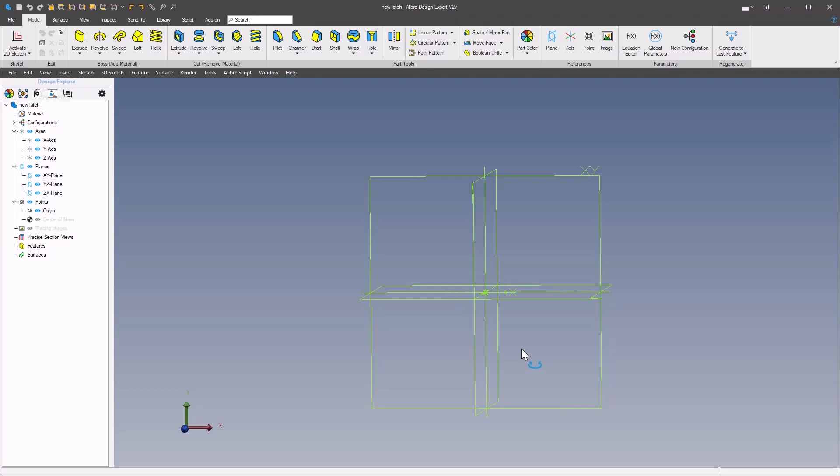Okay, in this video we're going to do another sheet metal tutorial in Alibre sheet metal, except this time instead of parts that have straight 90-degree bends or 45 whatever, we're going to do something a little bit different. We're going to do some stamped features. Now Alibre can bend this 90-degree bend without any problems, but it's going to have a major issue forming this part here. So what I'm going to go through today is showing you how I created this part, actually by inserting a drawing or an image and then modeling off of that image. So let's go ahead and get started.

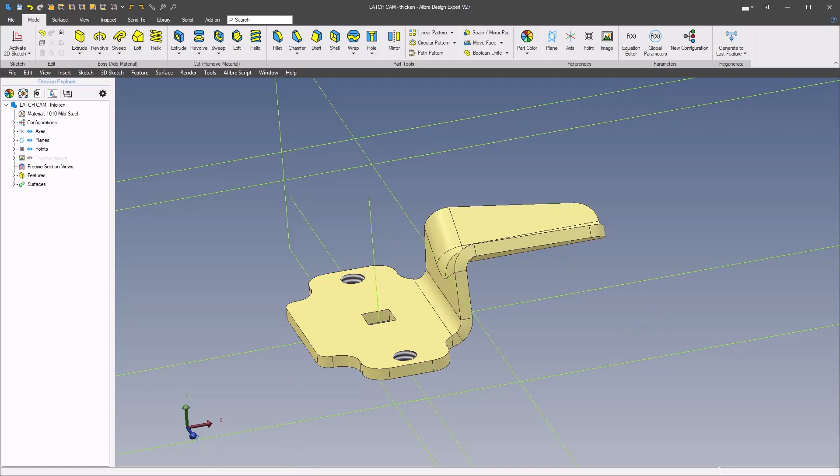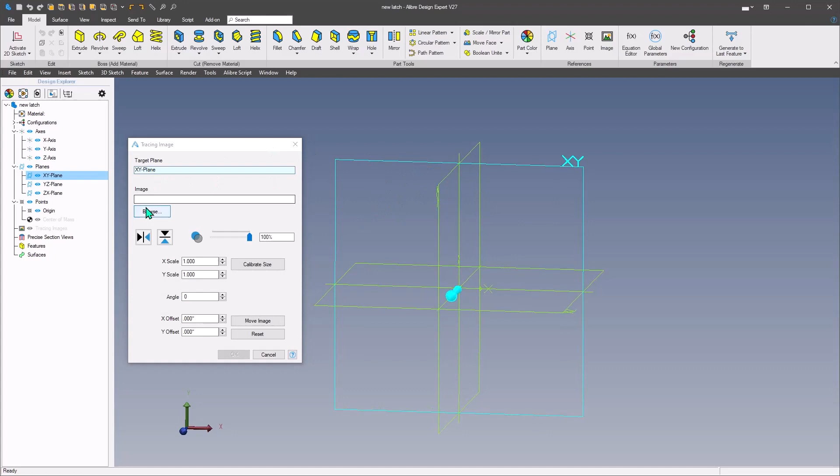So now in this new part workspace, the first thing I'm going to do is go up to my insert menu and grab the insert tracing image item, and then the first thing you want to do is select your target plane. So I'm going to grab the XY plane, and then the next one is click on browse to go grab the image that I need.

So I'll go to my Snagit folder and I'm going to grab my latch cam drawing. Now when you bring in an image, the first thing you want to do is make sure that your view is set normal to your screen, and then you want to scale your image so that you get the right size.

So we're going to calibrate for size, and I'm just going to come up here and click on calibrate, and then click on my dimension line up here, and then come straight down and click on this lower dimension line, and then I'll have a dialog that I can key in the 2.75 and press enter. And now this part is scaled to the right size.

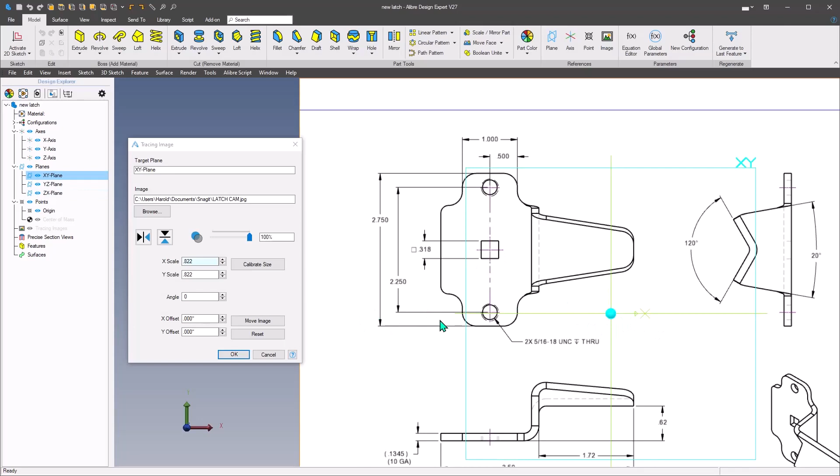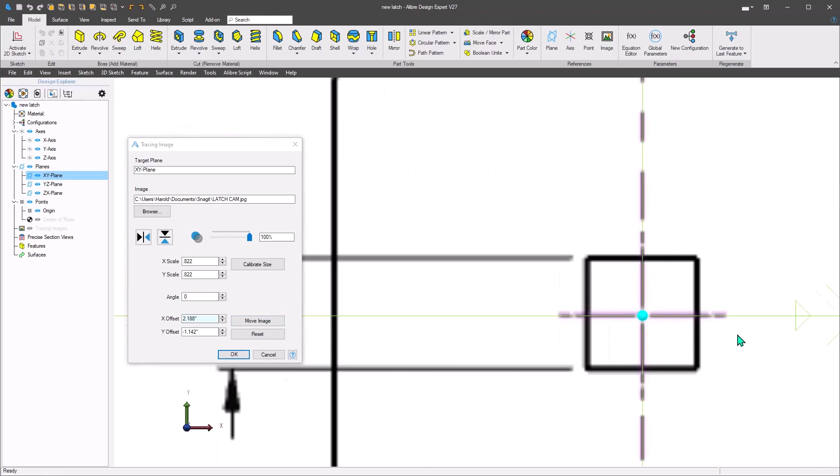Now this is my origin, and I want to get the center of this square hole over the origin. So the way to do that is click on move image, and now I can use a wheel mouse to scroll to zoom in. I'm going to put my cursor right on the center of that crosshair and click one time, and then I'll just pan over and then click on the origin, and the drawing will move to that location. You can tell that it's fairly well centered on the origin and the axis lines. And then click OK.

And come back here in the Design Explorer, and we'll just turn that back on by hitting the visibility icon. And now we're all set to start creating our part.

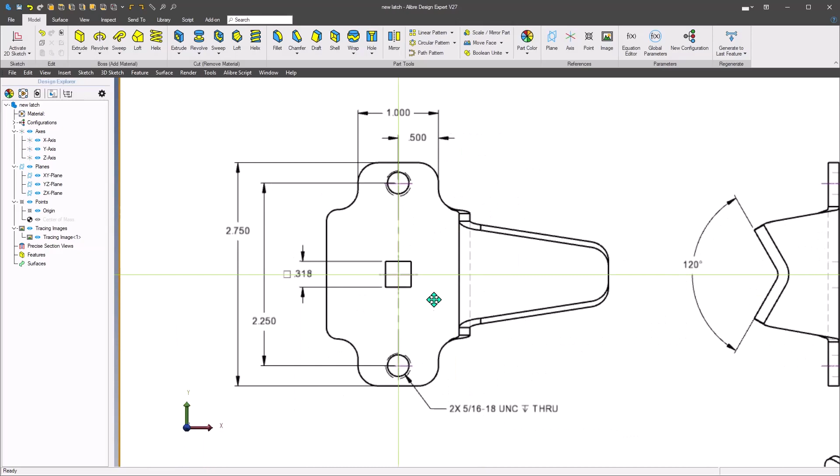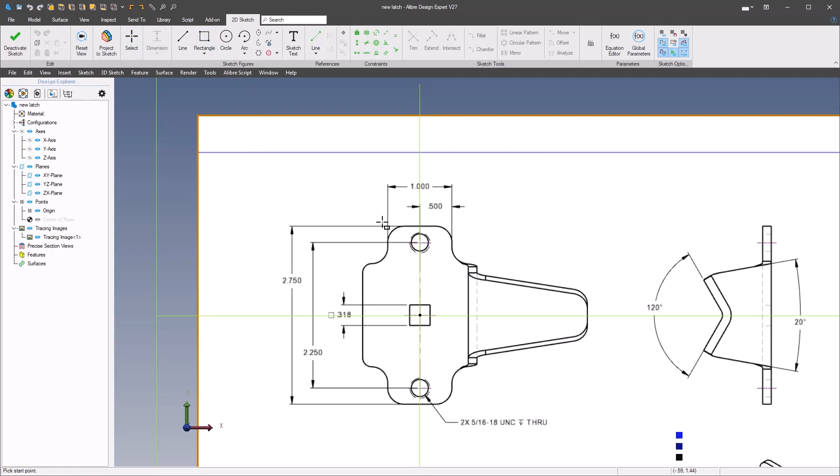So the first thing I'm going to do is I'm going to draw this profile here for the latch blank, or the flat portion. And what we'll do is I'll hit sketch, start my sketch, and grab my XY plane, and then I'll get some rectangles here, and I'm just going to draw a couple of rectangles. I'll just cross them over here, and then I'll trim out the middle portions here.

And then we'll add some constraints and dimensions to size this up to fit this outside profile of this body, of this blank. So put some dimensions on here. It's going to be 2.75. This is going to be 1. Then from this line to the origin, it's going to be 0.5.

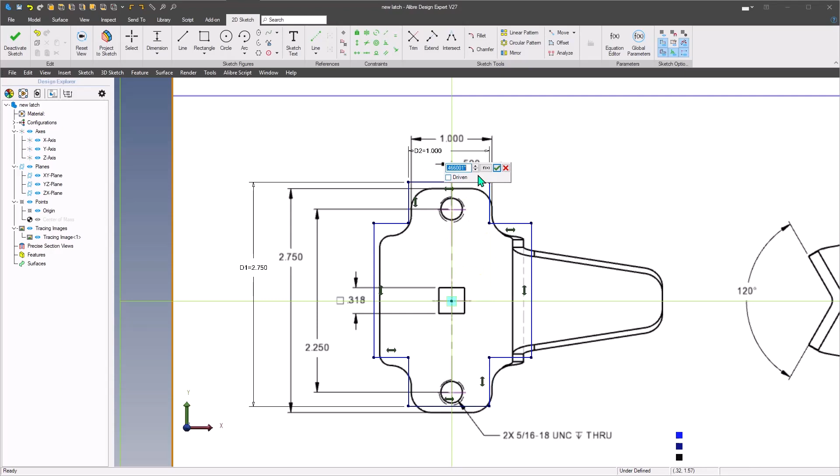And while I'm at it, I'm going to come in here, I'm going to do some constraints. So I'm going to make this line and this line equal, and I'm going to make this line and this line equal. And now if I click and drag on one of these endpoints, I can make sure that everything is moving the way I want it.

So I can drag this down so that it lines up with the profile of the latch blank, and then we'll have another dimension in here from here to here. Let me grab again, 1.562. Okay, and then we'll go across over here, and let's make this one 1.781.

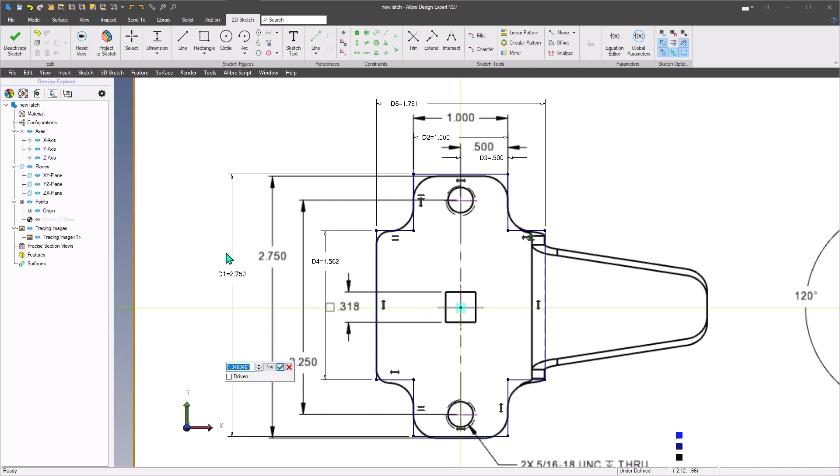And from this bottom line to the origin, I'm going to take 2.75 by 2. That's going to be 1.375. Okay, and now let's see how everything lines up here. Our outside lines look pretty good.

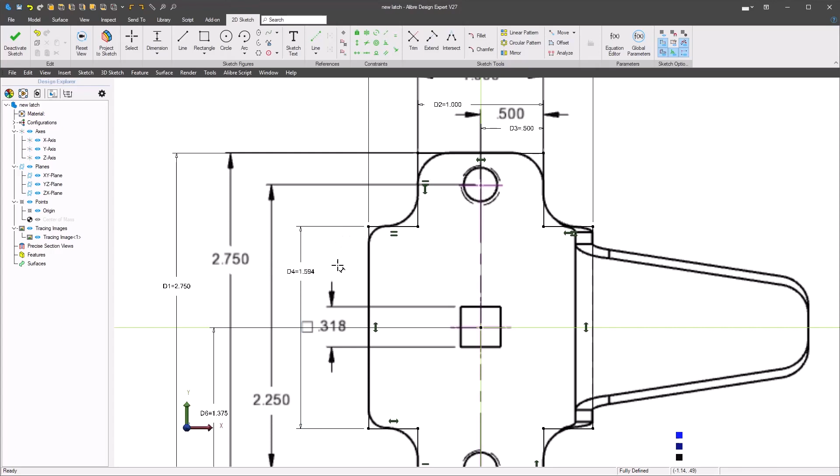This one here looks a little bit shallow, so let's go 1.594, just bump that up a little bit. Okay, that's looking better. So we're looking okay as far as profile of this section.

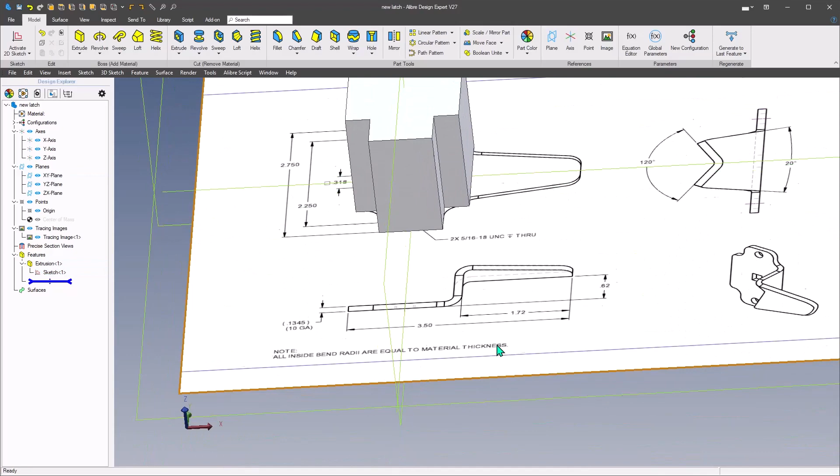Now we'll just come up here and go to the model tab and hit extrude. Now here I only need that to be about 1.75 for an extrude height, which would be more than enough, because we're looking to get it high enough so that we can develop this surface coming up at 90 degrees at 0.625, and there's going to be a bend in here that we need to accommodate. So we're high enough on here now that we can come off of this face to make the geometry or the features for this tongue that's coming out.

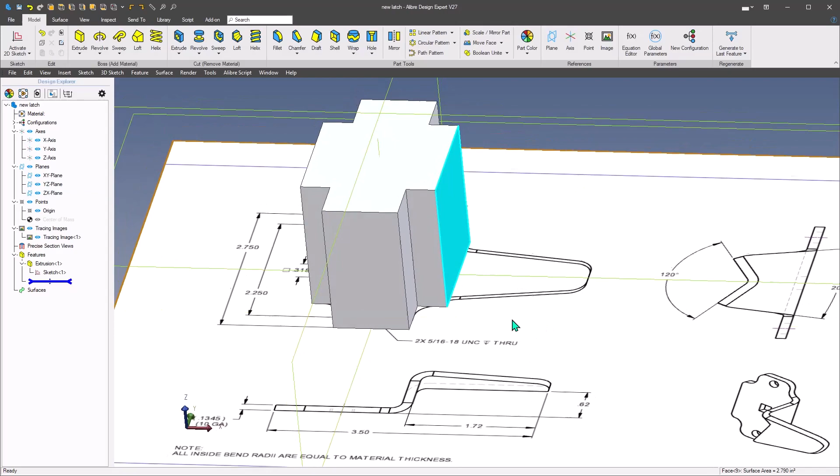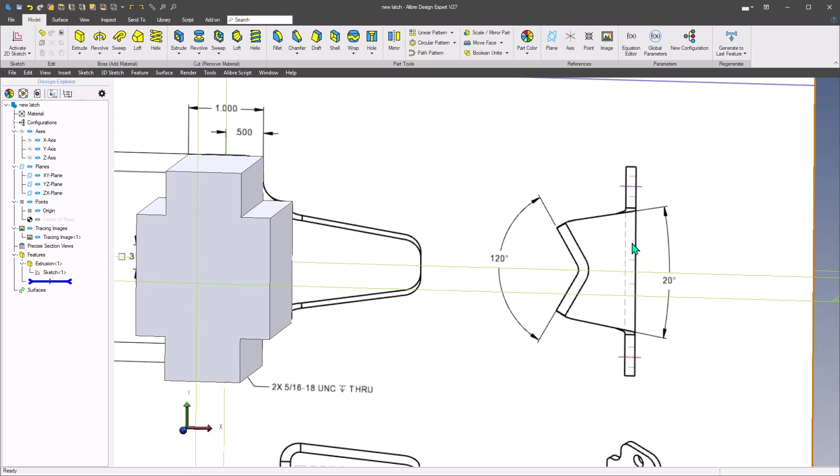So now let's do a sketch on this face, and well, before we do that face, let me back up here. We've got an angle here of 20 degrees on this face, on this edge and this edge here. There's 20 degrees. So that's easy enough to do by using draft. I'd come in here and I could select these two faces and put a 10-degree draft on each one. But if you're working with Atom 3D, then you don't have access to the draft tool.

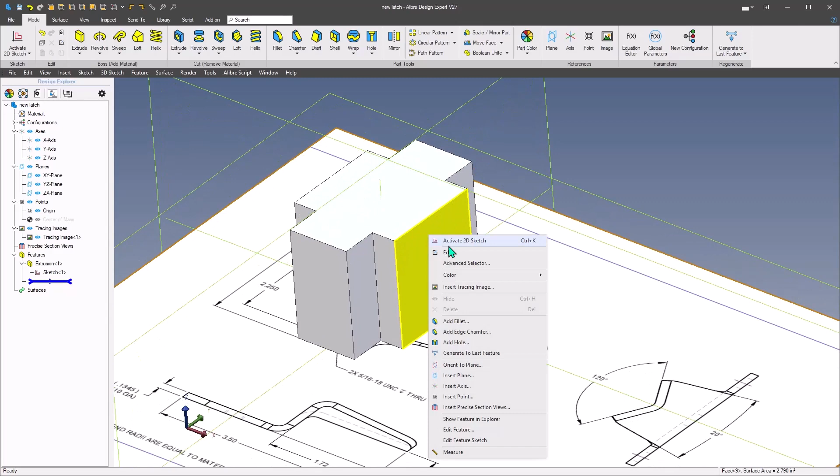So what I'm going to do here is I'll start a sketch on this face, and we'll project this edge and maintain an orientation or association, and then we'll just draw in 2 more lines and dimension this to 10 degrees, and we'll do an extrude cut.

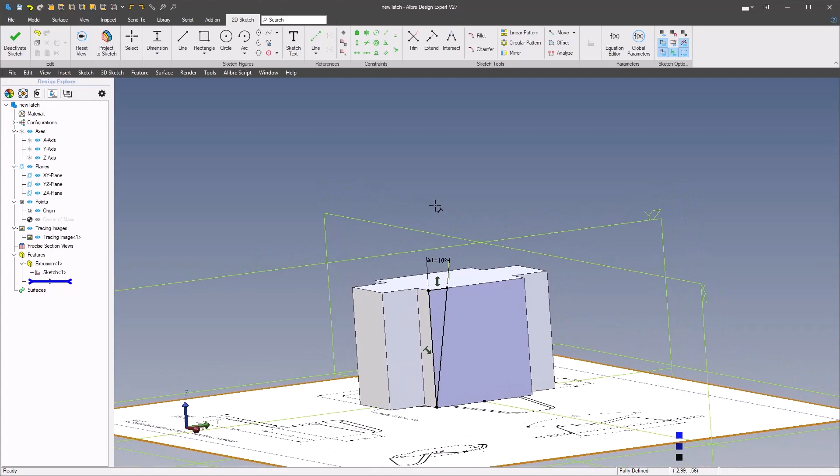We'll go to geometry, and then finally we'll mirror that feature across the XY plane. Okay, so now we've got the main body, and now we've got this 20-degree slope on here.

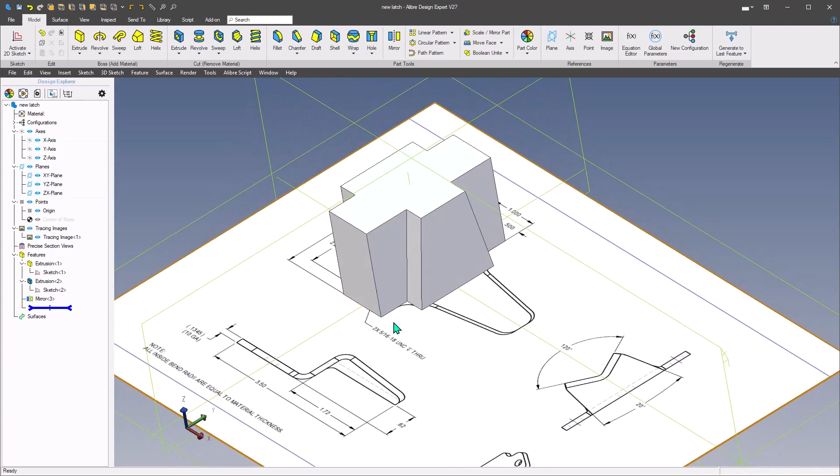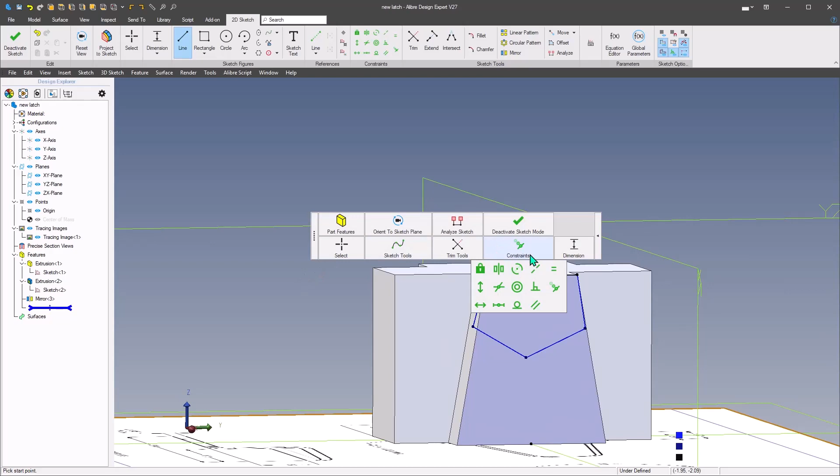Now on this face with the slope angle, we're going to start a sketch, and I'll project this line, maintain association, and then come in here. I'm going to come down and just sketch in that profile roughly, and put this coincident to that edge, this line to this edge.

And now we need to put a fillet on here, and our drawing has a note here that says all inside bend radii are equal to material thickness. So this is an inside bend, and we're sketching this outside bend right now.

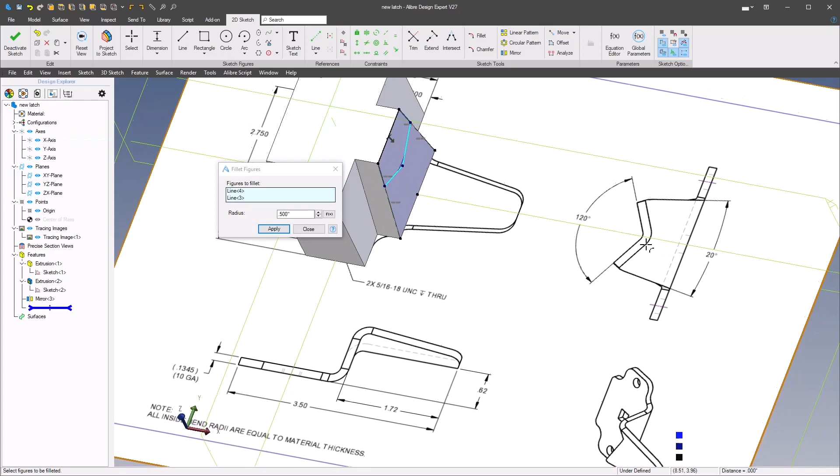So this material thickness is 10 gauge, 0.1345. So if we put in a radius of 0.1345 times 2 and close that, now we've got the outside radius of this part of this feature defined.

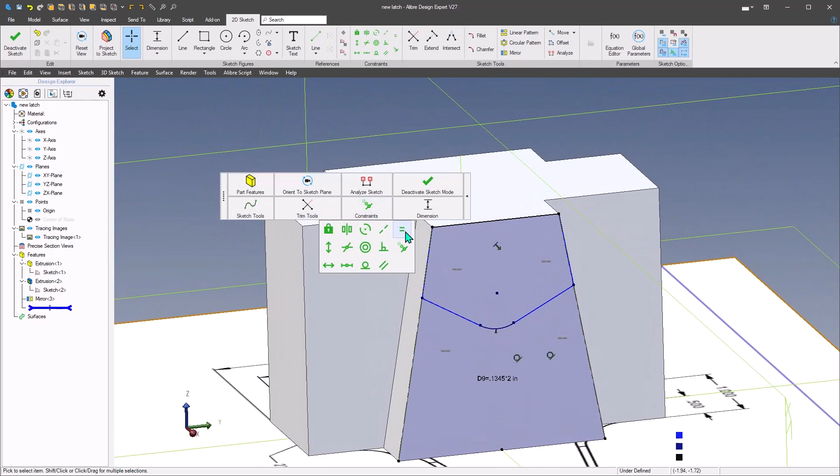So let's make these 2 lines equal, and we'll get our plane oriented here, and we're going to do a horizontal from the center of the arc to the origin. Okay, and then while we're here, we're going to do a vertical from this end point to this point, and this just can't do it.

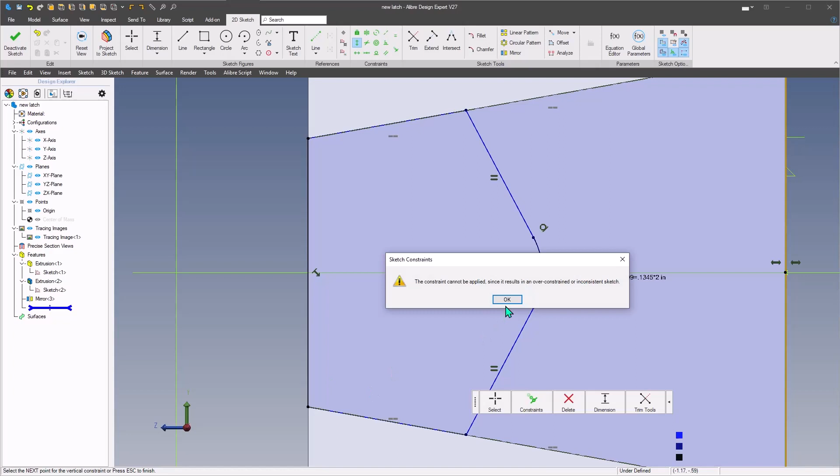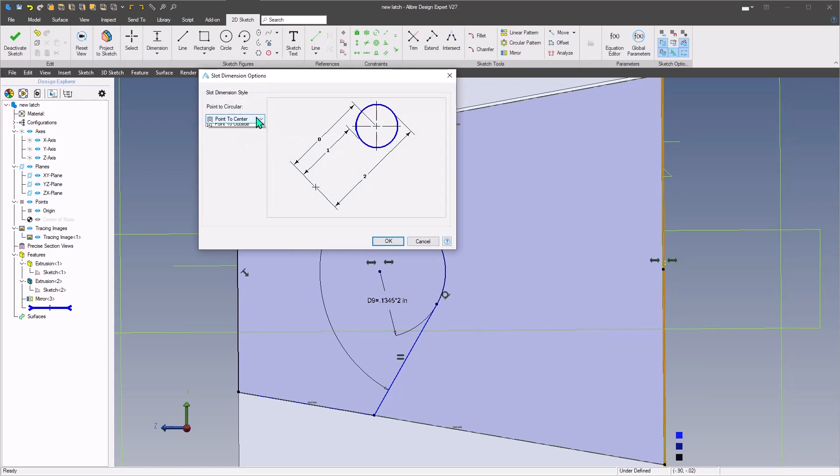Okay, so let's just do a dimension then. Put on here, we need an angle in here of 120, and then we need a height of, from here we'll go, let's see, it's going to be an inside 0.62. There we go. All right, now we've got that fully defined.

Now we can do an extrusion, and we're going to come out 1.72.

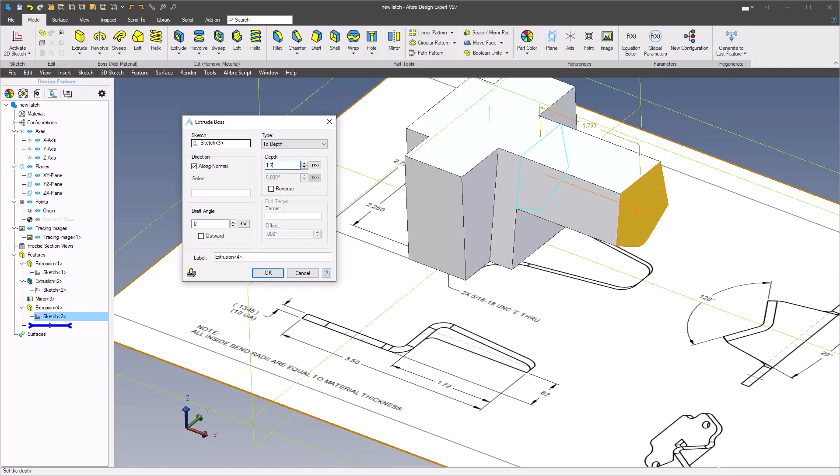Okay, so now, if you notice, this view here shows a taper on this part that's sticking out. So on this face here, we'll start another sketch.

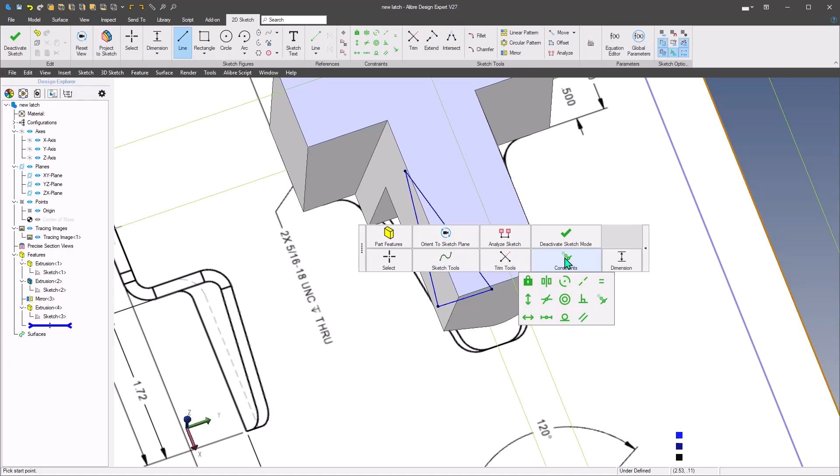We'll just throw in some sketch lines here, and I'm going to make this line coincident to this edge and this line to this edge, and then I'll make this endpoint coincident to this edge.

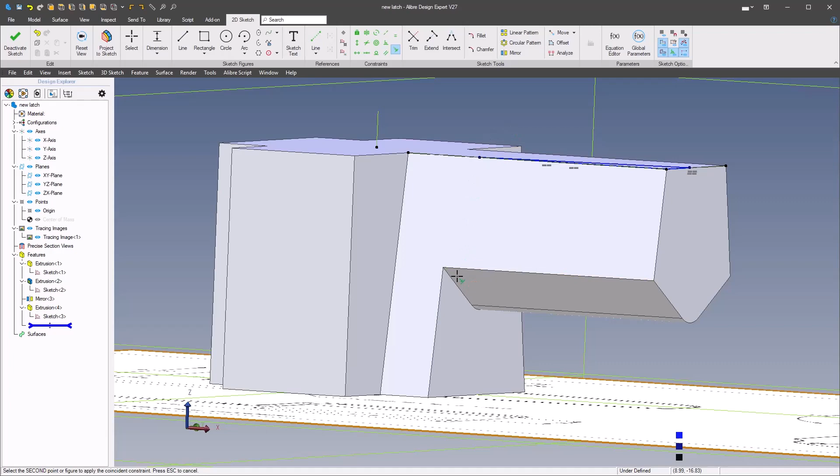If I can get it, coincident point. Well, what's going on here? Okay, let's go coincident from this point to this edge.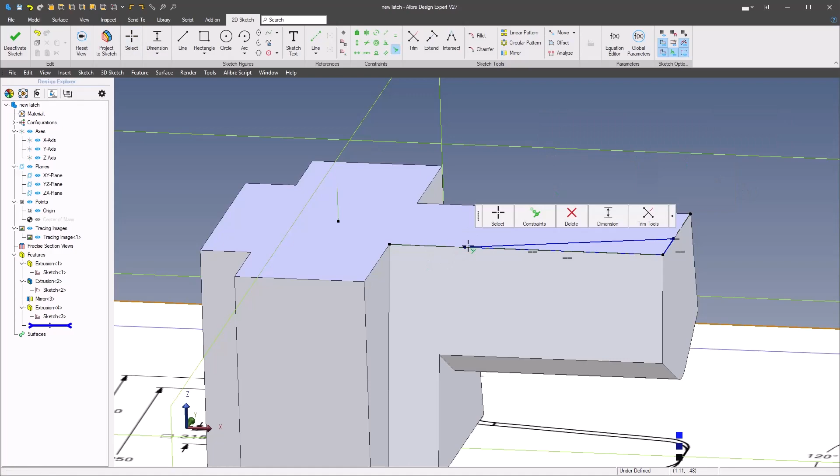There we go. All right, now let's put an angle on here. Dimension this at 10 degrees so that it'll match the slope of this face.

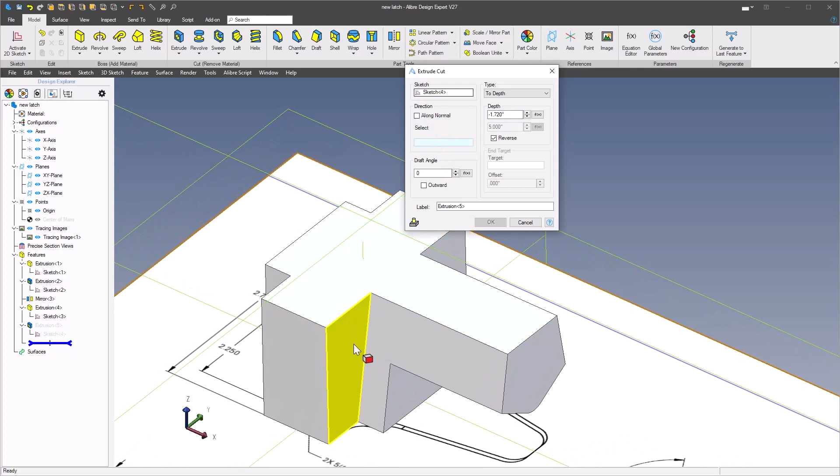And then we're going to do an extrude cut, and it won't be normal. Deselect the along normal, and then in the select box we want to select this edge and let it go to geometry. We can just select this face here, and then we're done.

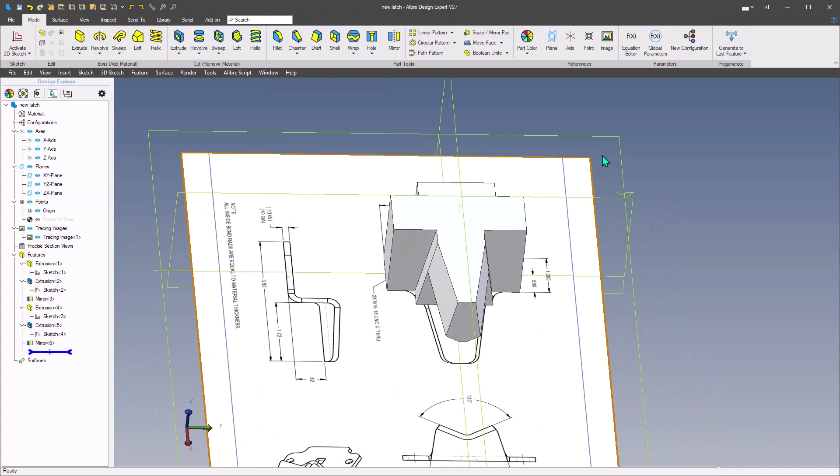Okay, and then we'll mirror that cut across the XY plane there. So now we've got the angle set in here, we've got our length, we've got our radius.

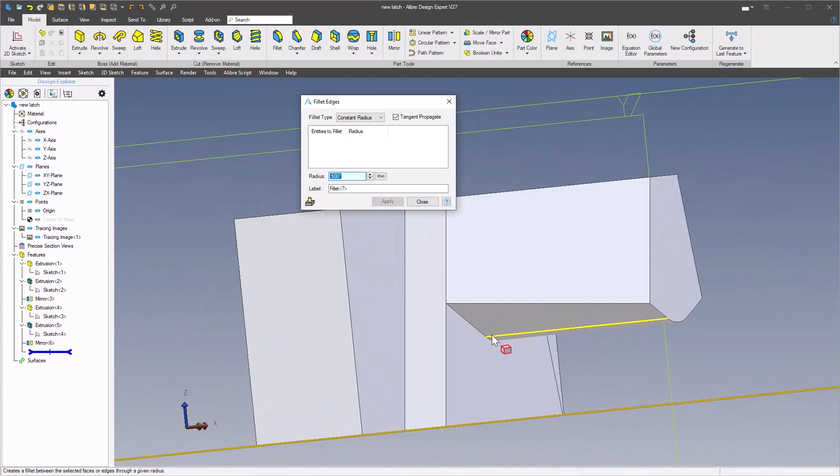Now we need to add some fillets. So if we come in here and we add some fillets, again our inside radii are going to be equal to material thickness. So there's going to be a bend along this edge and along this edge.

So this is going to be an inside bend. So we'll make that one equal to material thickness, and we'll just grab this edge here, and it transitions around because tangent propagate is turned on.

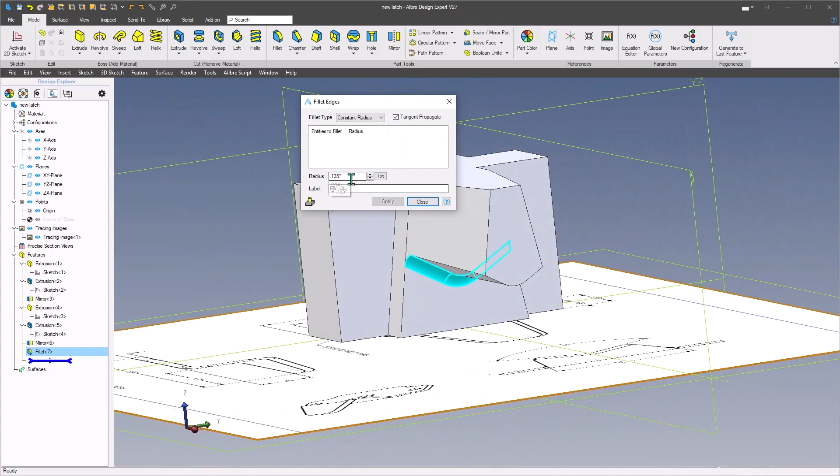And then on this edge, we'll just multiply that times 2. And grab this bottom edge and apply there.

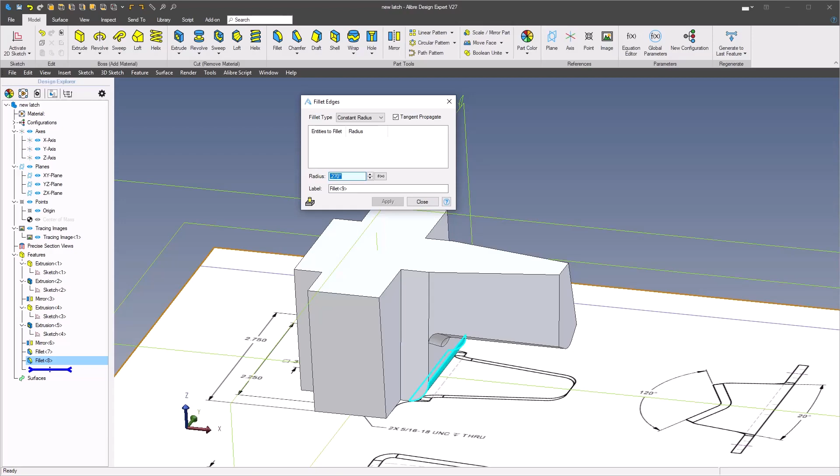Now for these other corners here, let's put like a 0.25 radius on these edges here.

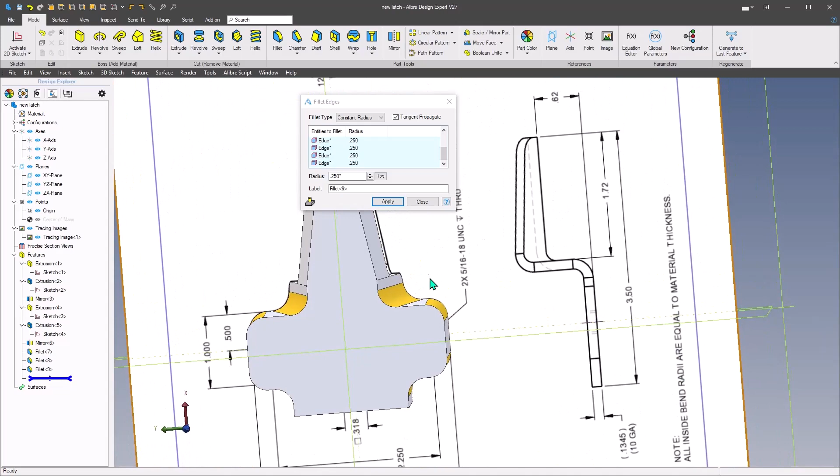Okay, and that's looking pretty close. It's going to match up with the drawing.

Now for this one down here, let's try a 0.14 radius, something that's greater than material thickness, so it's easy on the punch. And there we have it.

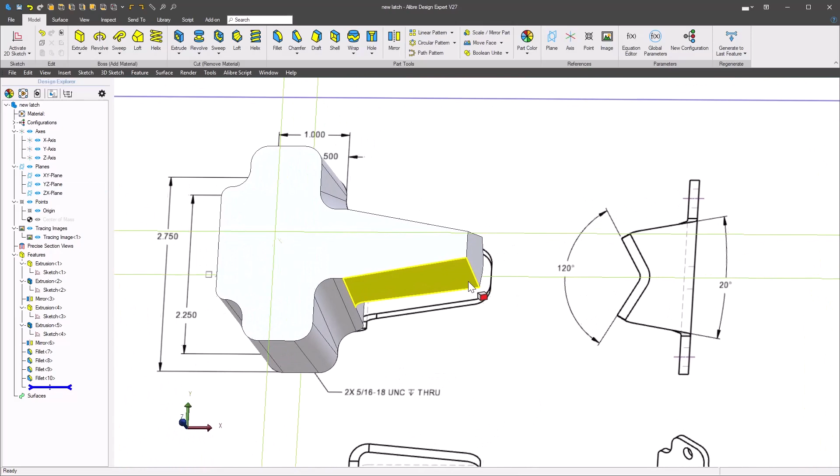Now we got one more out here on the end, so let's grab this fillet that we had the 1/4 inch radius on, and we'll just add these 2 edges there, and then we're done.

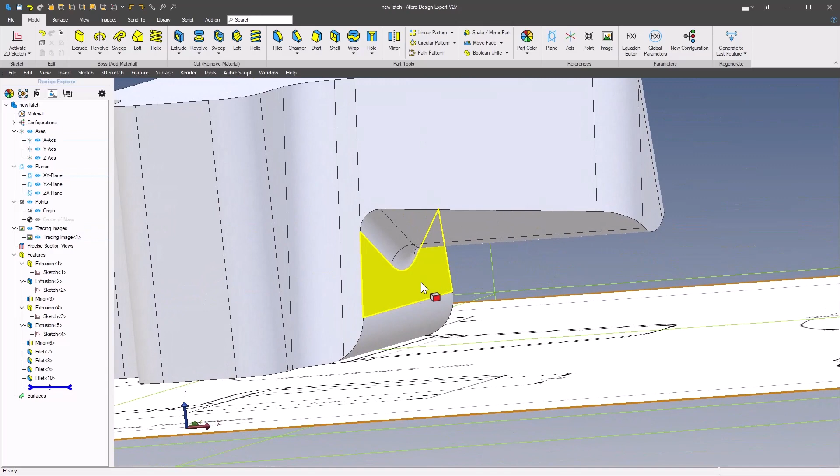Okay, now we got our block. What I'm going to do is we're going to go ahead and shell this so that these outside faces, excuse me, these are going to define the edges or the surface of the blank.

So let me turn off the image so it's out of our way. And this is going to be the outside surfaces of our part. So if we come in here, for the benefit of those that have Atom, we'll grab the shell tool.

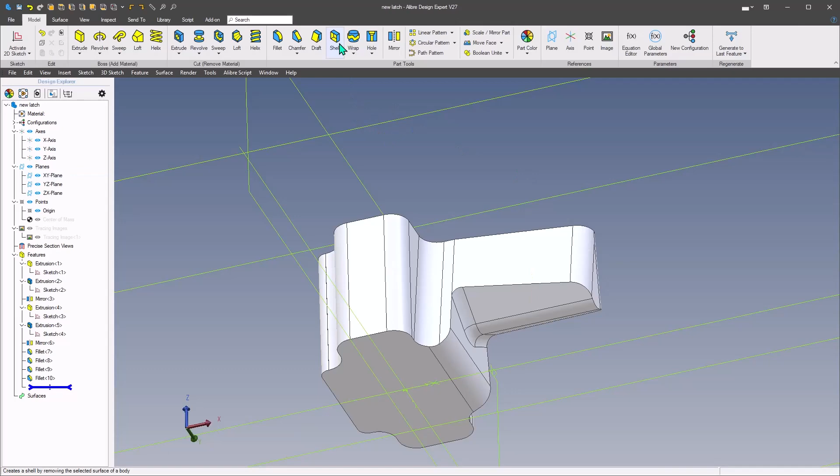And we'll set our thickness to material thickness, and then start selecting faces to delete. And as you do, you can see that the part starts getting built up.

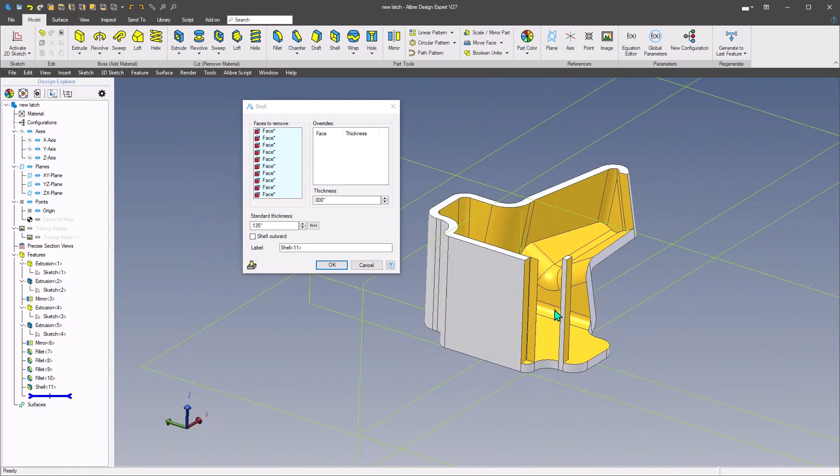Now, one thing to notice is here that you're going to spend a lot of time picking faces. If you have a part that's fairly complex, you can spend a lot of time selecting all these faces. So here's a little trick that I've learned, that right now my display only shows surfaces.

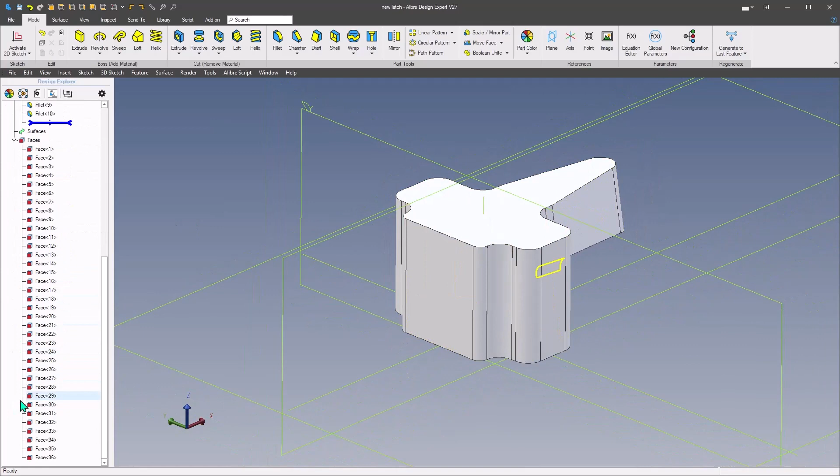If I come up here and select the Explorer tree options, come down here in display and turn on the faces, and OK that. Now, if I come down and open up faces and expand that, and I'll select the top one, scroll all the way to the bottom, hold Shift and select the last one. Now all the faces are selected.

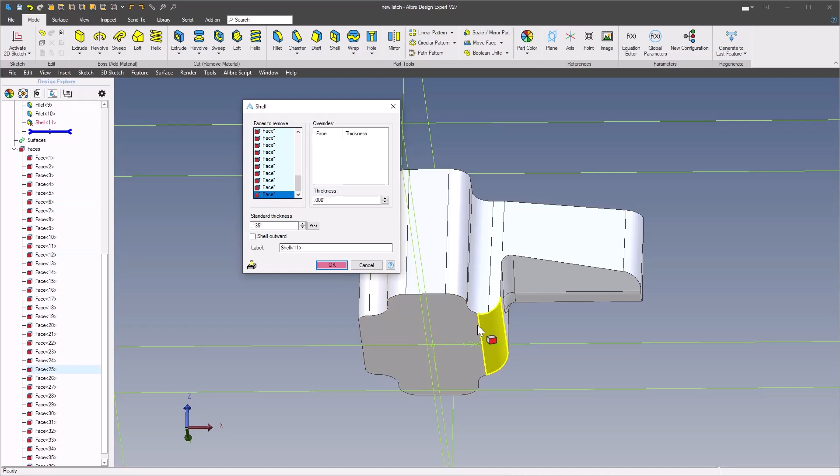I'll hit Shell, get my thickness set. Now what I want to do is come in here and I'm going to select just those faces that I want to keep. So I'll select that one, this one, this one, this.

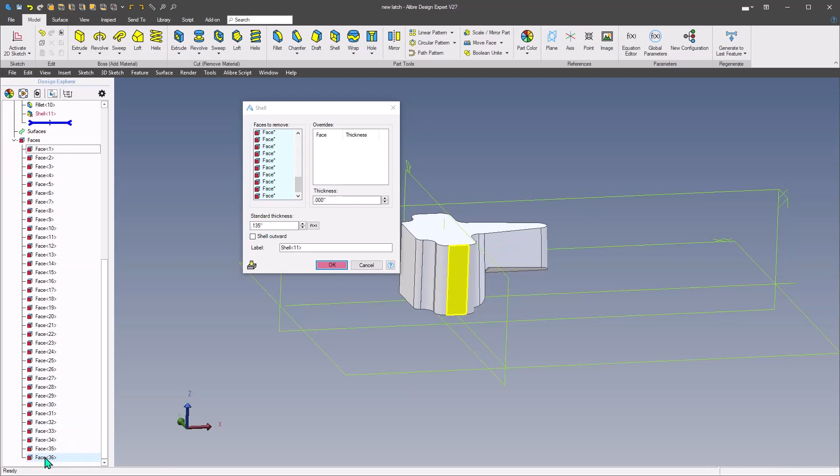And that didn't work. Let me back up again. Hit Shell. Select the top one. Shift select. And then we'll select

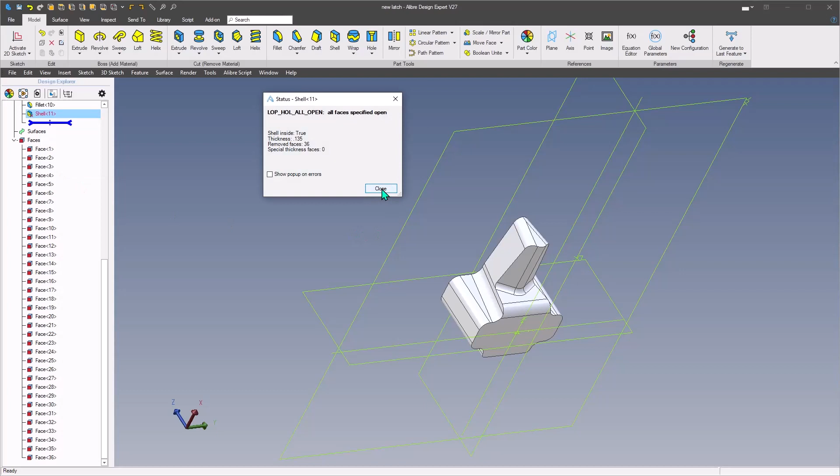Status. Let me think on this. Be back in a minute. Okay, I'm back here. Here's the deal.

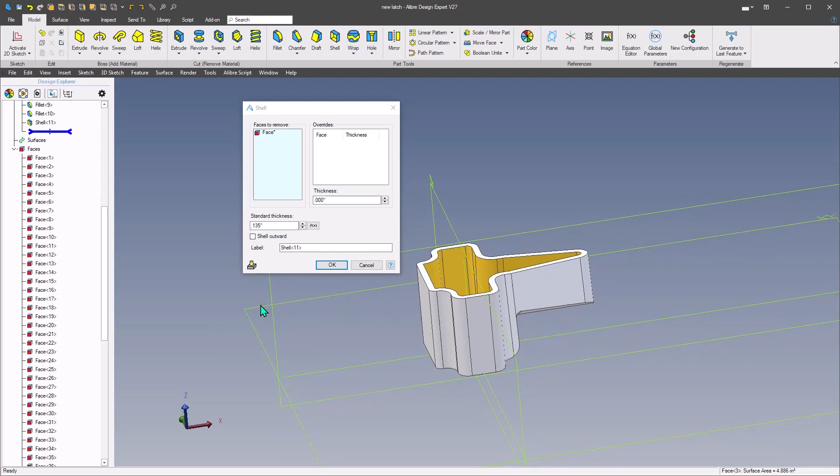In the shell, there's this little toggle button down here called Toggle 3D Preview. When this is on and you start selecting faces, you get a preview of your shell. You want to turn this off so that you don't see the preview, but it's still going to show you the faces that are selected.

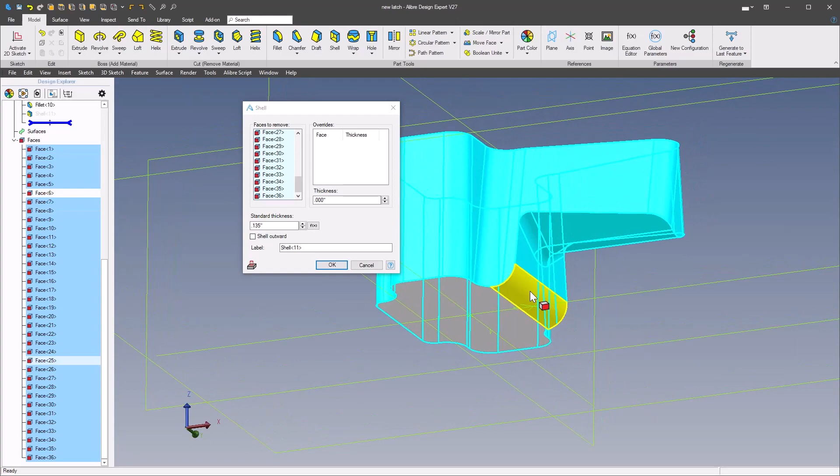So again, we'll select the top one, scroll down and select the last one. Now I can come in here and select this one, this radius, this face, these that make up this radius, and these three. Now if I preview, I've got my part, and OK that.

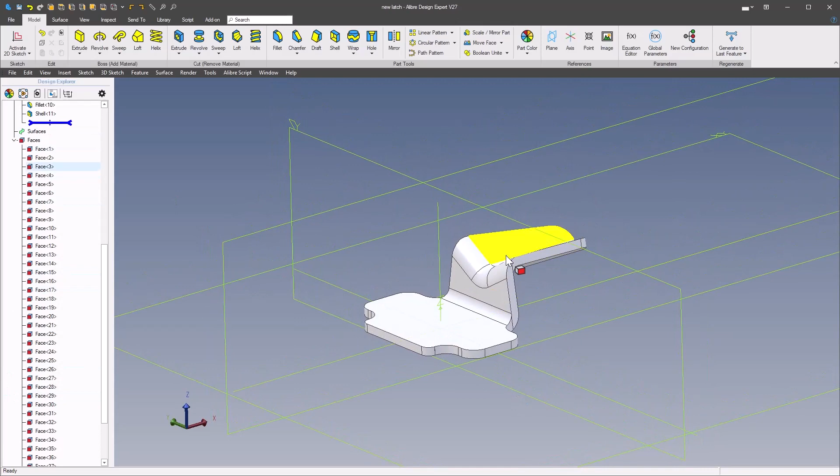And that's a lot quicker and easier than having to go through and picking each one individually. Now the only thing that's left to do is add the holes in here and saving the part out into your location wherever you want it.

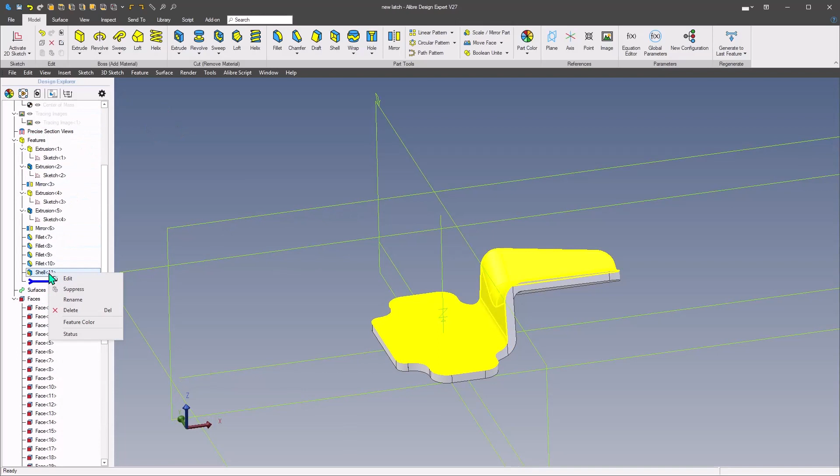Now, for the benefit of those that have Pro or Expert, let me scroll up here. I'm going to delete my shell. Now, if you have surfaces, we're going to do a delete face on this.

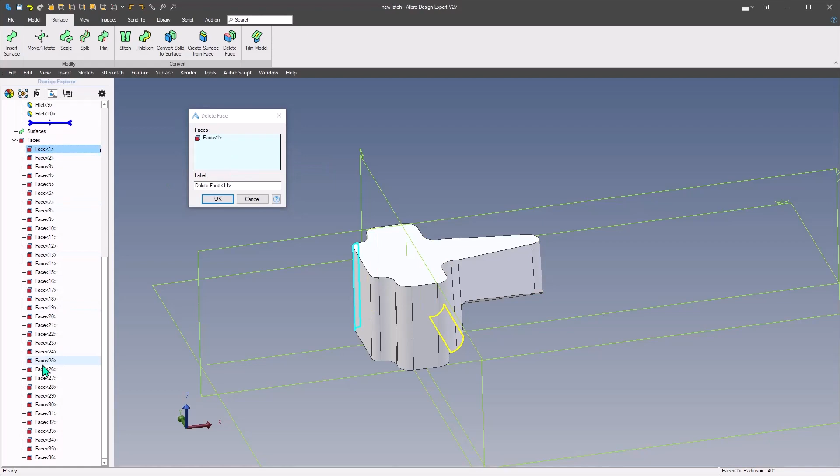Now here, the same trick applies. Select the top one, or the first one in the list. Shift select. Try it again. First one, Shift select the last one. And now we have them all selected.

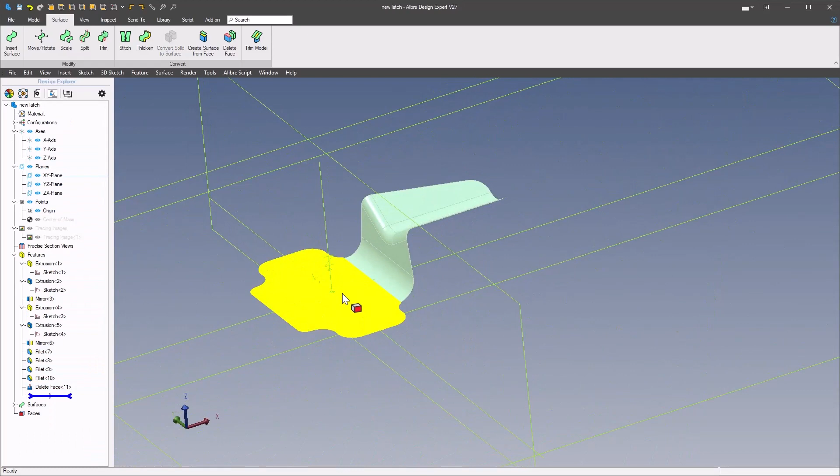Now notice that delete face does not have a preview option, but we can still come in here and select those faces that we want to keep for creating our part. So now hit OK. Now we're left with a surface that encompasses the outside surface of the formed part.

Then come in here and grab thicken, select our surface, get our thickness set, and we'll change our direction to inward and OK that, and there we have our part.

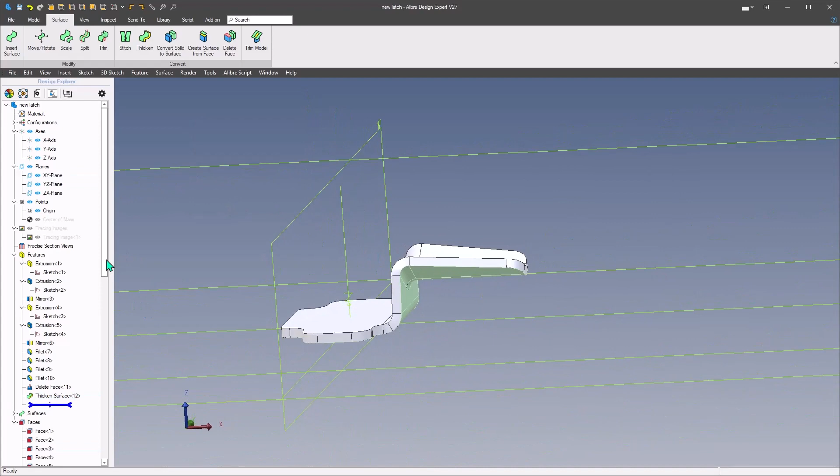And we can fold up our faces folder, and in the surfaces come in here and just hide that so that it's out of the way. Now the only thing left to do, whether you use shell or delete and thicken faces, is turn on your tracing image if you need to double check anything.

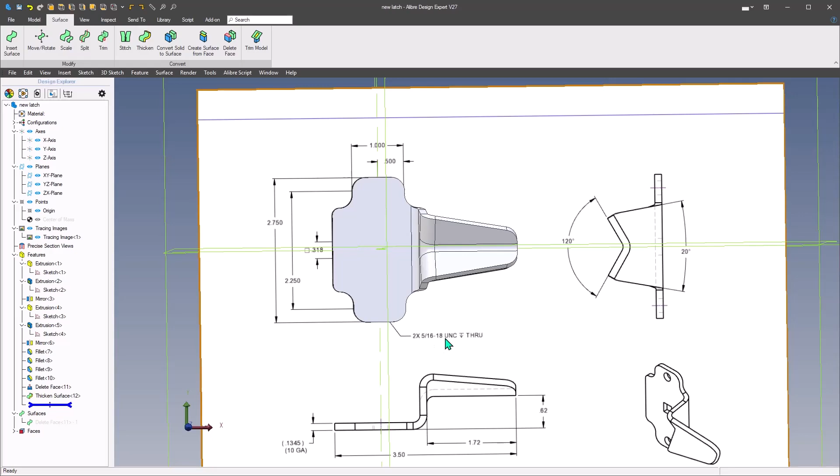But we need to put in some holes and our square cutout in the center, and those you can do without the tracing image on.

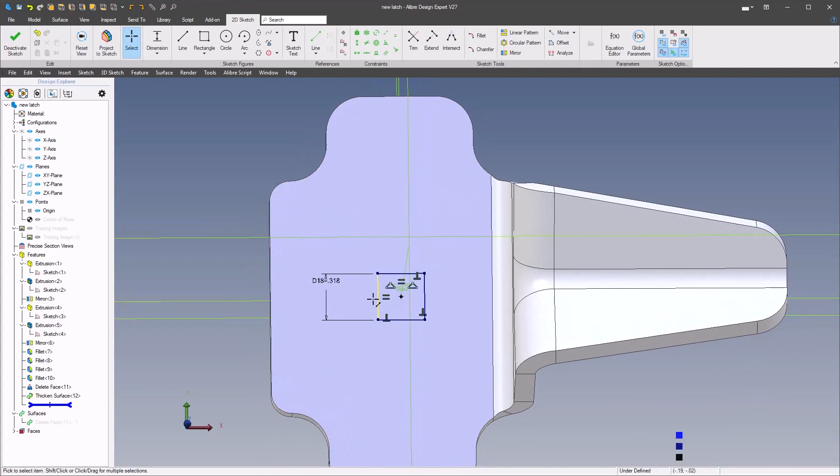We go back here in model, grab this surface and have a rectangle, and here I'm going to use the rectangle by center, and we'll make both edges or both sides equal. Dimension this .318, and then we'll have a vertical constraint there, and then we'll cut that through all.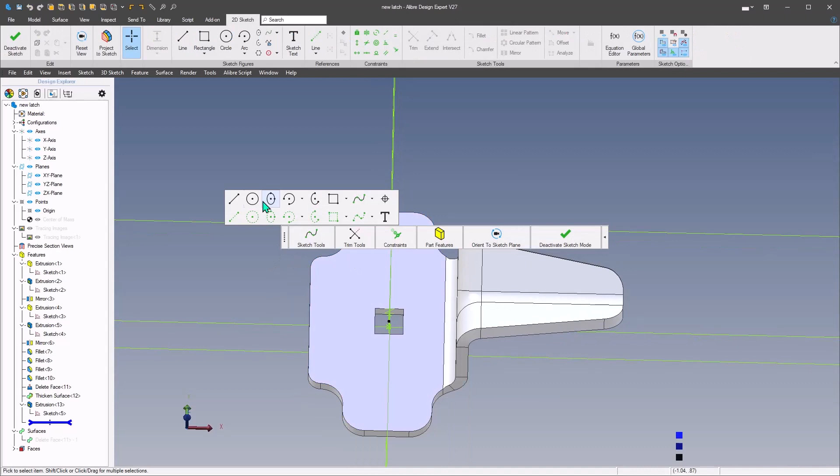And then, now Atom does not have the hole tool, so in the case of Atom, we'll just have a sketch. Here we'll put in a couple of holes. 0.257, if I remember right, that's going to be the drill size for tapping this hole.

And these are going to be 2 1/4. And from here to edge, .25. And then we'll get some constraints here. Got a vertical between all those, between the origins, and now everything is lined up.

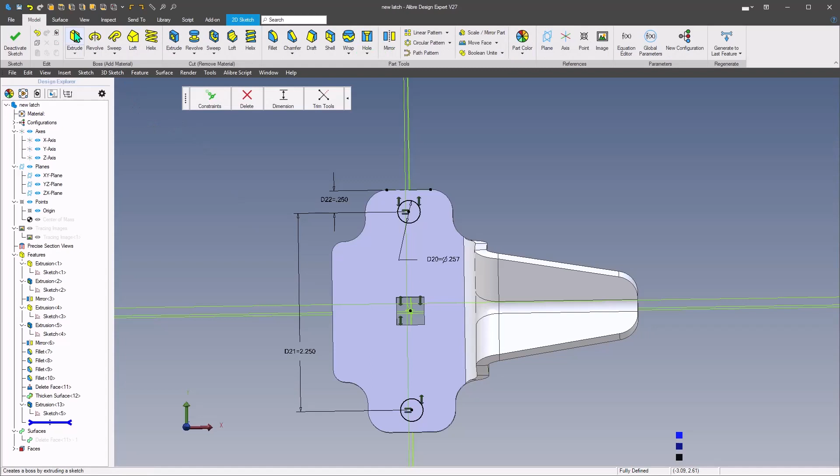And then we can do an extrude cut. Set that through all, and that completes your part.

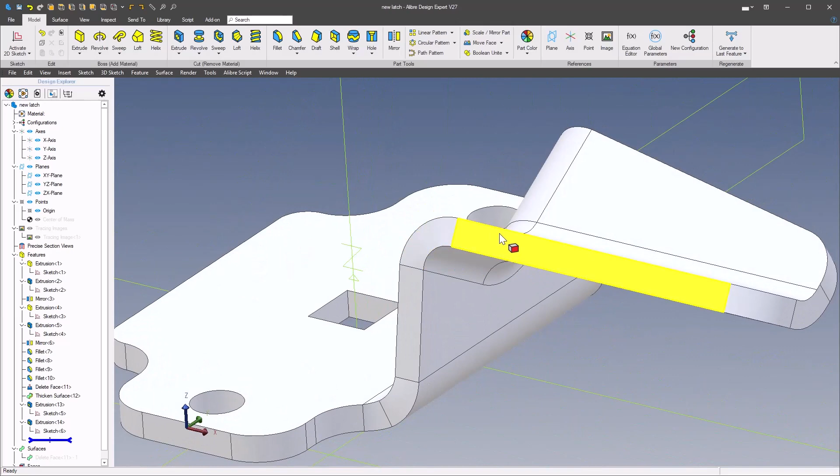Now, one thing you want to notice too is that when you do an offset or a thickened face with a delete face and offset thickened surface, you notice that there will be a transition on your edges here that is going to be normal or 90 degrees to the faces that you select. When you do a shell, that's not going to be a true 90 there, so it'll look a little wonky, but it'll be good enough that it gives you a latch blank that you can use in your equipment.

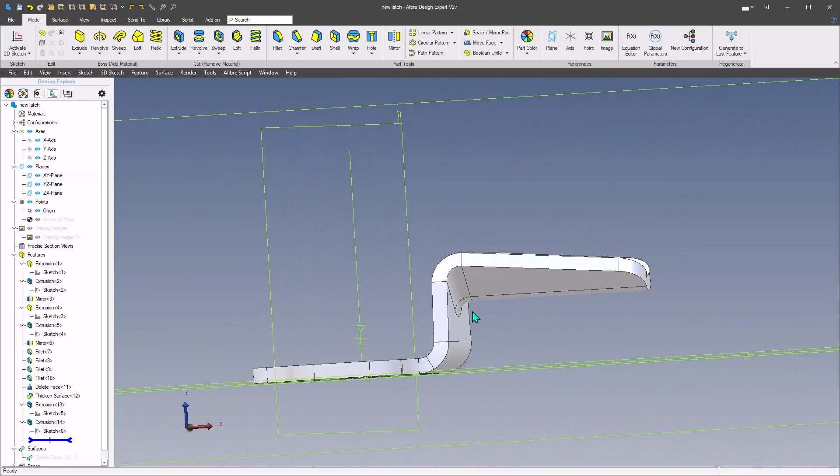So anyway, following this technique, you can set up to do stamped sheet metal parts. Now this is fairly simple. Here's an example of another simpler one that I did some time ago out of basically a strip of 14 gauge material that has another complex bend, and this one too again is basically you start off with a blank solid, and then you just start cutting away from the part, adds your fillets.

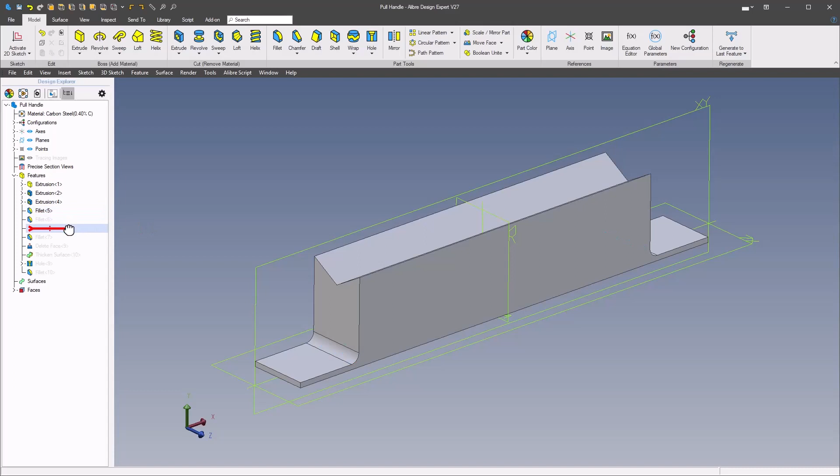And this one again I did a delete face and then thicken surface, and then finished it up with holes and a radius on the end there, so you've got a complete part.

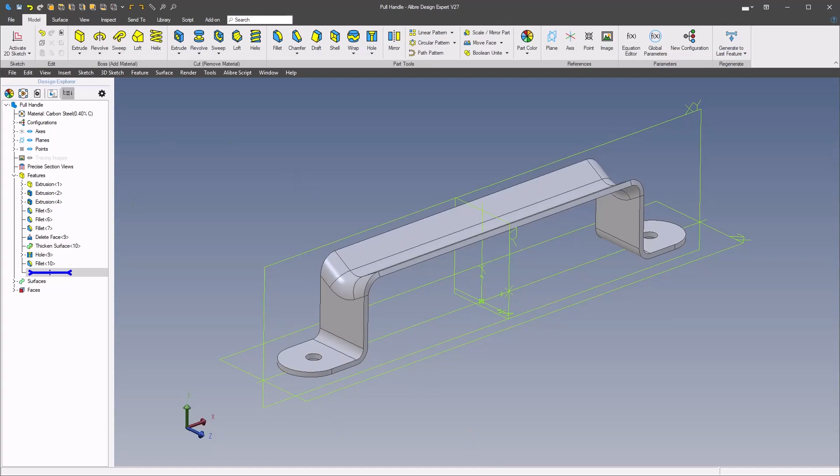So then you can even go into more complex parts. Here's a stamped drawer slide, and again these all started off with a solid part that I modeled up and then used the delete face and thicken to create the sheet metal part.

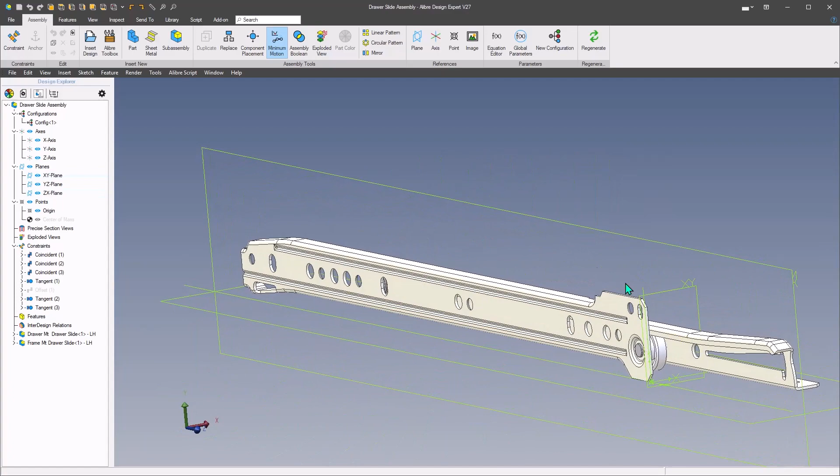So anyway, hope this gives you some ideas on how you can create stamped sheet metal parts in Alibre. So thanks for watching.